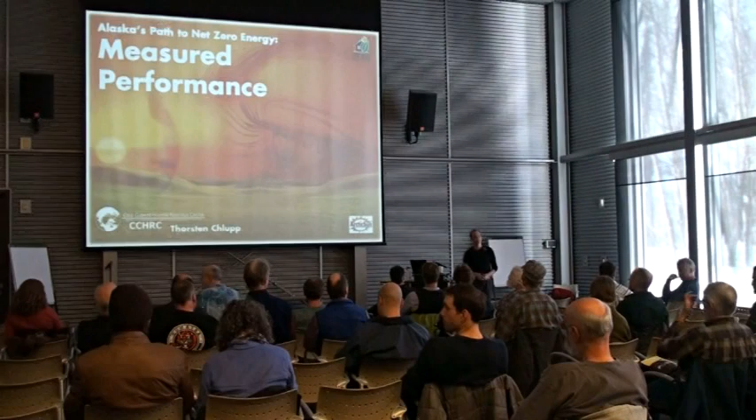Well, my background is basically I'm a home builder. I have a design build company in Fairbanks for about 12 years, and I work quite a bit with the research center. For the last 7 years I've become obsessed with energy and how to build highly efficient buildings in our northern climates, and especially the last few years have been quite a roller coaster ride for me. I believe we need to change, so that's my personal mission.

Why is measured performance really the crux? We can build buildings like this, but we really have to look back after a year and figure out, does this really make sense? Cost is really the driving factor for most of these projects. How do we build buildings which reach almost zero energy in our climate without spending so much money that it doesn't make any sense?

So looking at the Sunrise project, basically, that was to me more or less a research project. It was a personal house I built starting in 2010, finished in February of 2011. It's my personal family home, a new house I moved into with my family, we have 2 kids living with us and my wife. It was basically a goal of trying many different systems, and in the end, can we reach a building in this extreme climate which reaches zero energy?

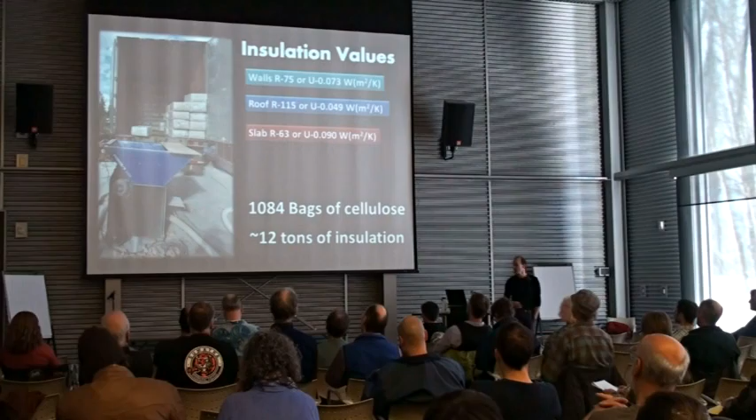The roof insulation was R115, and then the slab insulation R63. I established these values from historical data on buildings we've done before, and in addition, PHPP, the modeling software for Passive House, which gives us these guidelines on what we need to do to reach these levels of efficiency.

In this building, we use cellulose, a very low embodied energy insulation material. It's very cheap, locally available, made in Wasilla from recycled newspaper. We used about 12 tons of insulation on this building.

This machine is called Enforce 4. It's basically a machine I purchased to blow this insulation - an insulation blower. We'll talk about some of this more later too.

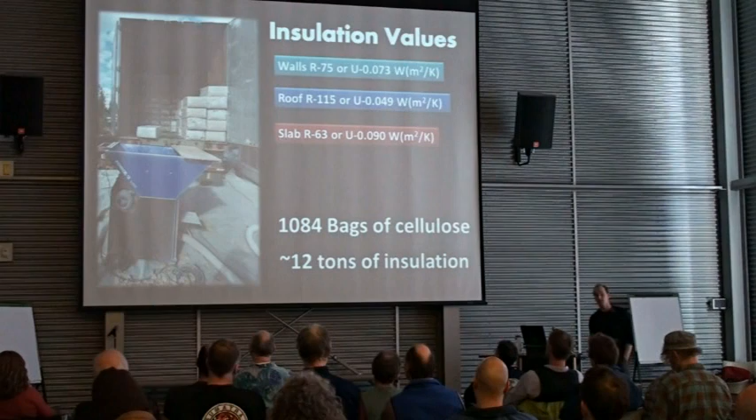Then the big crux of the whole project, really to get it to the level where it needed to be, was seasonal storage. This is not the first project I've done - I've chipped away at this for 3 years prior with different other buildings we tried. It's a very controversial topic. There's a big movement in Europe called Sonnenhaus, where they're building buildings just like this. However, in our climate, it's a little different, and it's very expensive what they're doing in Germany.

Average tanks are in the $54,000 to $60,000 range. So how is this feasible in our climate? How can we sell it to people and provide solutions? So I was just trying to come up with some more affordable ideas. I used a 5,000-gallon old stainless fuel tank, which we cleaned up and retrofitted, and we'll talk about how we went about this.

And now we're looking at one year later. This has kind of been a rough ride - a lot of things have gone right, a lot of things have gone wrong. It was an extremely challenging project, and it took a lot of thought and figuring out, and that's kind of how I feel today. It's a long road to really figure out all of these systems, and I'm not claiming I have all the answers, but I'm sure trying, and that's, I think, all we can do.

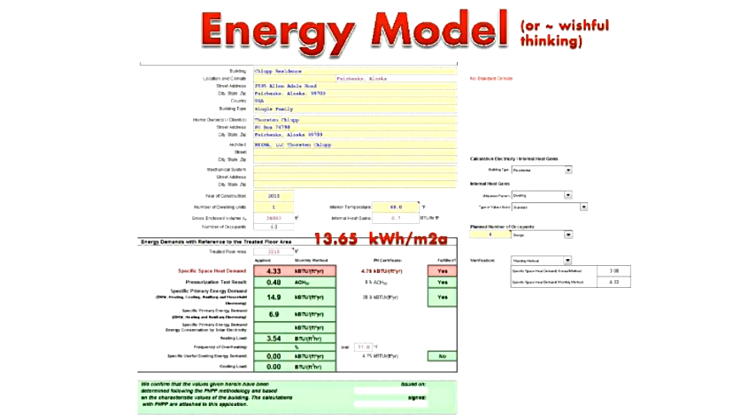Basically, the model gives us a benchmark which we need to achieve for passive house, which is 4.75 kiloBTUs per square foot per year, or 15 kilowatt hours per square meter. That's basically our target range as far as heating demand goes.

Air tightness is the #2 number here. The 0.6 is our benchmark. I personally believe for very cold climates like here, we should set that benchmark even lower. I'm trying to shoot for 0.4 right now. Energy and air tightness is really closely correlated.

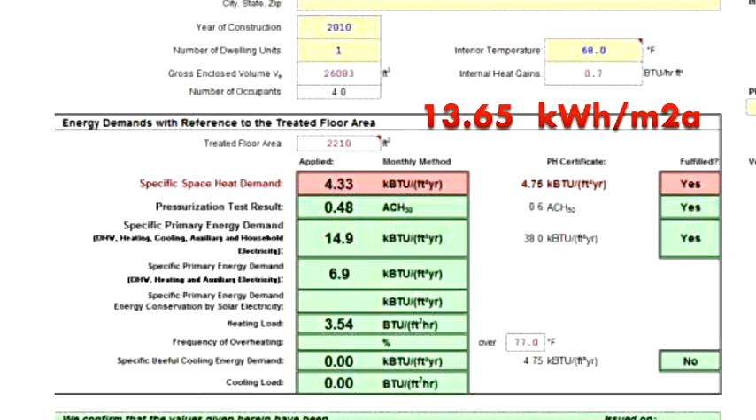And then primary energy, basically that's the total energy consumption, electricity and all of the other things combined. And then cooling for us in our climate is really not a big challenge.

So energy rating at the end of the project in Alaska, we have through Alaska Housing, basically the 5-Star Plus program. As you can see, we had 100 points, so there is no more than 100 points. If we have 110, nobody knows. The software is not geared at all at high efficient buildings. We're still stuck in the 80s as far as how we're looking at buildings.

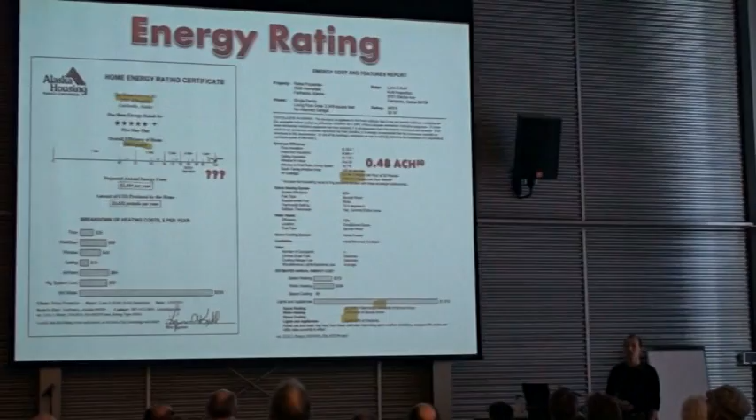And it's clearly shown on this energy rating, basically, which was done from a certified rater at the end of the project, that we don't know how to rate these buildings here just yet, which is sad because we really should build buildings like this.

And then, of course, a year later, it's very simple for us to figure out what did we consume and how much electricity did we use. I used quite a bit more electricity than I wanted.

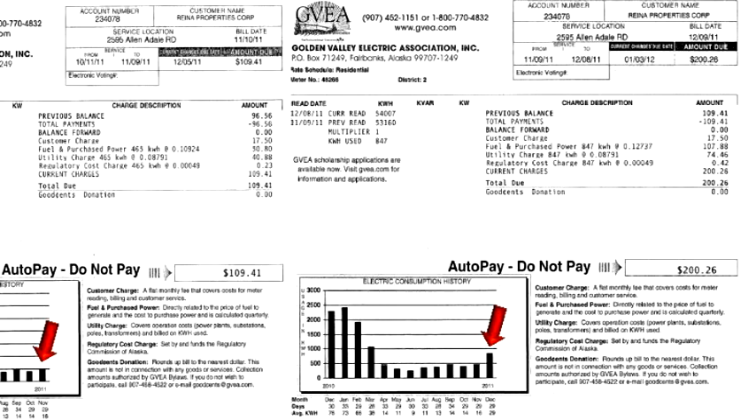One of the main things I completely forgot about was plugging in cars in the wintertime on the energy model. We did really well in the summer, but as soon as the winter hit, at Fairbanks we had a very cold winter this year. We already hit 50 below in November, which I've never seen before. And if you plug in 2 cars, that is a huge extra load on the building. I don't know how I forgot about that.

So we consumed for the first year about 6,480 kilowatts, which is not bad, but it's more than I wanted to be for the first year. So there's quite a bit of optimization I'm going to have to do to reach my goal, which was in the 5 kW range.

I have a lot of leverage still in lighting, where I spent not as much money as I wanted because I ran out of money at the end of the project. So with some better LED lighting, which we're going to upgrade to, will help. And then figuring out what to do with my cars.

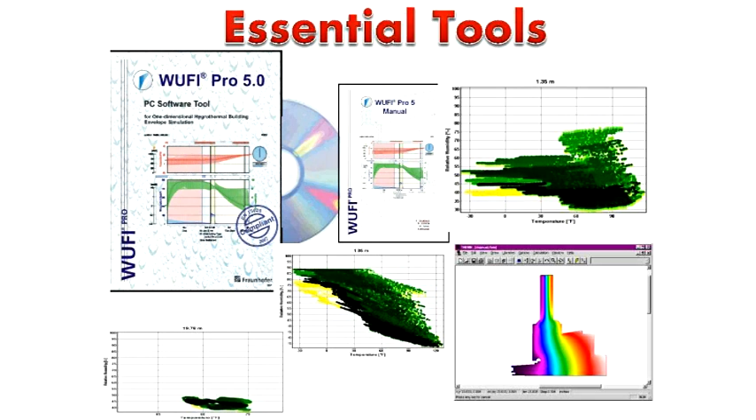Essential tools, basically, which we use to start off with. We extensively tried to model the wall system, which is the Fusion Open with WUFI, which is a professional software program developed in Germany from the Fraunhofer Institute. And then Therm basically was developed by Berkeley National Laboratories. That's used for thermal bridging.

And then during the 1-year period, I went ahead and spent quite a bit of time with thermal imaging, trying to figure out settling in the walls with the cellulose, thermal bridging, hidden thermal bridges, things which you just don't see with a regular eye, for optimization.

I'm very, very big on indoor air quality, so we spend quite a bit of time monitoring that. And then, of course, blower door test. We blower door test several times during construction to reach the air tightness level. And then at the end of the project, and then I always do one year later to see how is this really resilient, how is it performing a year later?

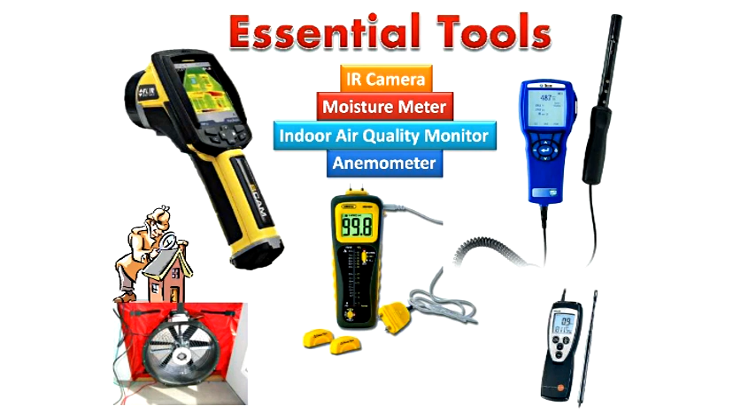And that's where we use the anemometer too, to measure these very low pressures basically on pressurization. Blower door, most people nowadays are familiar with. We basically place it in the entry door. We depressurize the house at 50 Pascal air exchange, and we measure basically the volume of the house compared to how much are we drawing out through small leaks.

And to reach passive house at 0.6 is difficult when one starts out, but for us it's really not a problem anymore to reach these levels. It's just the building system, the way we go about it.

In Europe there's a whole trade now basically for air tightness, like a carpenter here. It's an air sealing trade basically, where people go to school and that's all they do, they air seal buildings. In retrofit or? Either or, yeah.

New construction or retrofit - the United States is unfortunately the only country left in the world which does not place high interest on air tightness, whether new construction or retrofits. Our current energy code, the new revision, is still looking for 7.0 air exchange at 50, when we're looking at 0.6. That's pretty sad, especially in our climate, where that's the cheapest way to save energy, really.

In this building we have an extensive data logging system. Cold Climate Housing Research Center has a grant from Alaska Housing to monitor all of the systems, and there are many sensors placed everywhere to figure out what works and what doesn't. Unfortunately there's a problem with building science and monitoring buildings - it takes time. We're here a year later, do I have all the results I want? No. There's so much data that needs to be analyzed, and people don't have the time - everybody seems to be maxed out with many projects. So I wish I had 100% of the data from the first year, but I don't, and it takes time to figure all of this out.

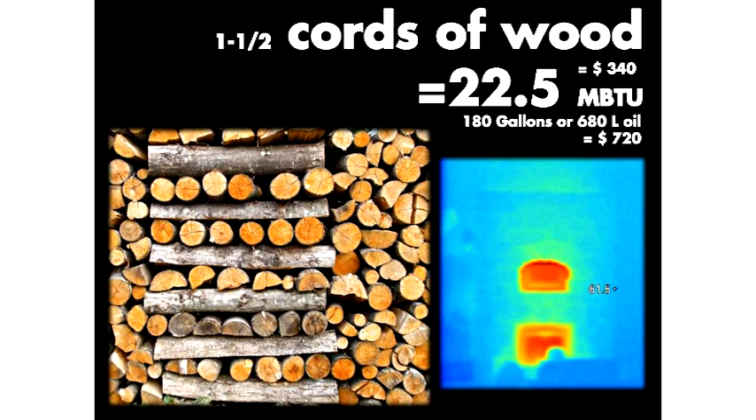So we burned this winter in our house 1.5 cords of wood, which is kind of what I estimated. To put that in perspective, that's 22.5 million BTUs of energy, equivalent to 180 gallons of heating oil - most people understand that a little bit better. So for a 14,000 heating degree day climate, for the dead of winter at 40 below, especially this winter which was very, very cold, I think that's pretty remarkable.

This picture here is the thermal image of my masonry heater. I just want to point out this is actually a picture taken into the window against the thermal shutter, reflecting the heat back into the building, which is pretty neat to see how well that functioned. That's basically the fireboxes - the rest of the heater, one hardly sees any heat coming off, which is very important compared to a normal firebox.

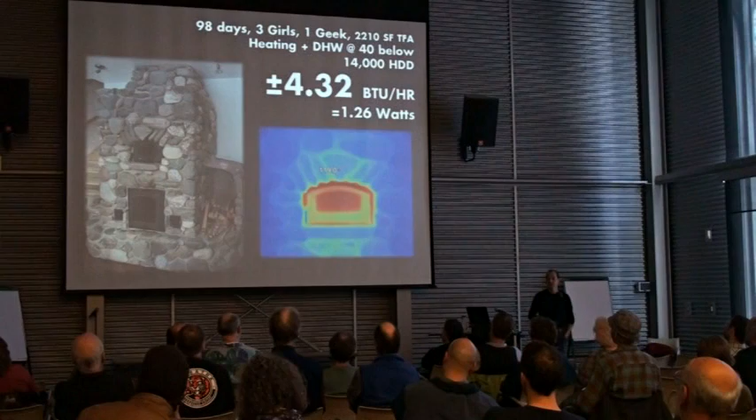You would completely overheat in a building like this because it's so super insulated. However, with a masonry heater we have so much mass that it radiates out slowly. So here in the thermal image again, there's a lot of heat but only a slow radiation of heat out of the building. I was a little worried about it - this is a 2-story building, 3 bedrooms upstairs, doors, all of these things which make heat distribution difficult. I wasn't so sure how this was going to work with just the masonry downstairs as the main heat in winter without anything else. But it was really never a problem.

We fired it usually once in the morning and once in the evening, and at 4.32 BTUs per hour basically, we didn't have a whole lot of heat demand.

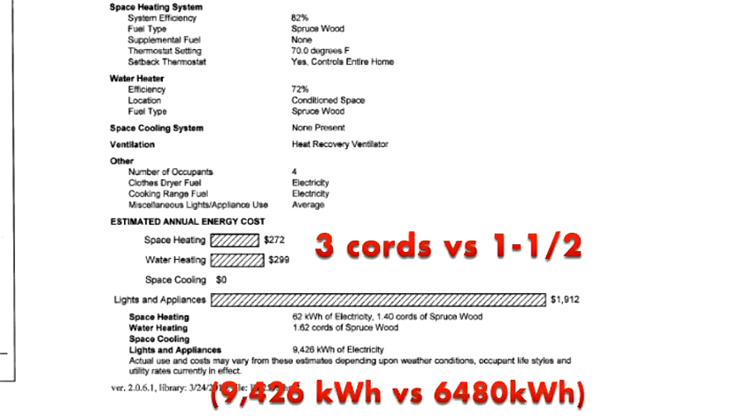So if you're looking back at our energy rating, estimated with 3 cords, we only used half of that. Also electricity, about 30% less. I just want to point out that this software program, AkWarm, basically for buildings - especially high-efficient buildings - is completely unsuitable. It's a very good software program from the 80s, but nowadays we should really come up with some better means of rating these buildings.

So we're looking at a climate in Fairbanks where we're dealing with 40 below temperatures. What's the problem with 40 below air? There's nothing left. At under 40 below, there's no moisture left, period. So one of the bigger challenges we face for healthy buildings in Fairbanks is how do we keep healthy indoor environments? We need to maintain, in my opinion, about 40% relative humidity for human health. However, in any other building I've built before, in the dead of winter, we're running about 20%, 50% less. Which is a huge problem.

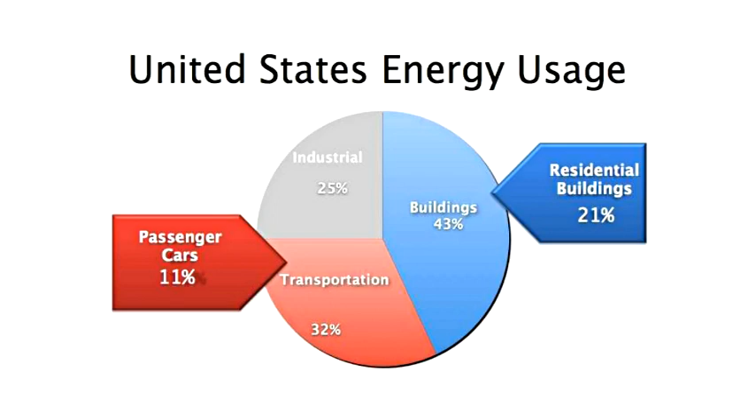The problem is we're running out of heat. So if we're looking at the United States energy usage, really, just to put a perspective on it, why are we really concerning ourselves with buildings? Because it's really the biggest consumer of energy. Most people don't realize that. They think that transportation is the problem, but it's really buildings. Buildings is the low-hanging fruit where we can gain the most.

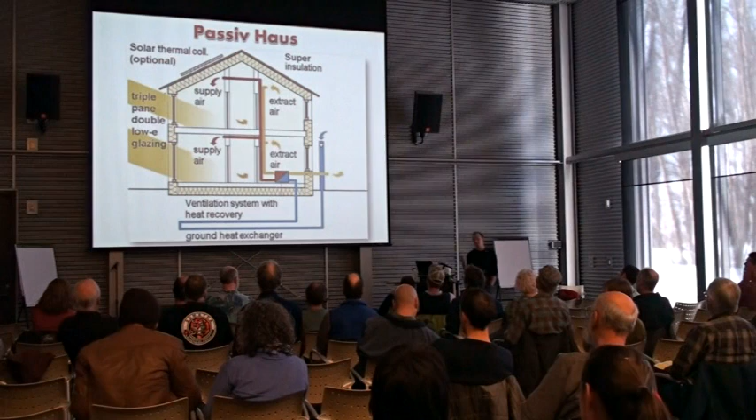Going to net zero is a little bit more. Are the German and Danish figures achieved with the infiltration standards you described? Yeah, in Germany there's over 20,000 certified buildings. We have 13 certified Passive Houses in the US right now. We haven't even scratched the surface as far as the United States goes. We're really not into that yet.

Can you, on that last slide, say how that compares to your units? You had 1,000 BTUs, 1 million BTUs per square foot? As far as my building, the conversion between the two - we're at 15 kilowatt hours per square meter, basically, which is what Passive House prescribes. I was at 13.62, so we're definitely at Passive House level.

So just to recap, Passive House is really all about insulation, air tightness, and reducing primary energy demand. The big missing link from the 70s, when we'd already done all of that in the first oil crisis, was ventilation. We built a lot of really super-insulated buildings in the 70s. Older folks here know all this. Passive House more or less was invented in the 70s in the United States and Canada. But we missed the important point that we need to ventilate very airtight buildings.

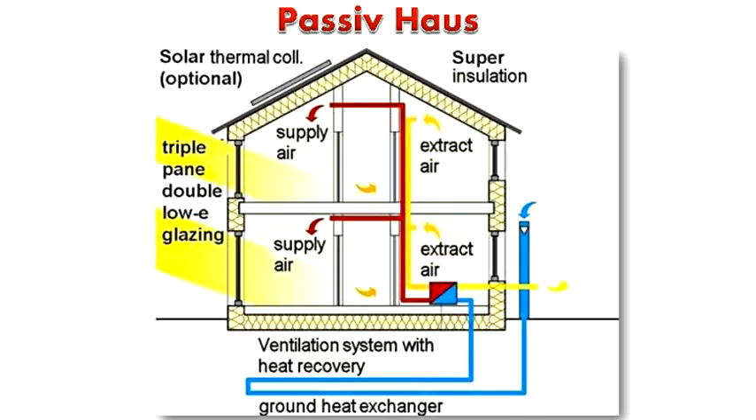Technology wasn't there, our knowledge wasn't there. We knew everything else on the building side, but we didn't understand how to ventilate properly, which led to mold problems, moisture problems, very uncomfortable houses which started rotting away within 10 years. That's, in my opinion at least, why super insulation never really caught on here in the 70s - not because it didn't work, but because we didn't understand ventilation.

So if we're looking at this, what do we really need to do? I think we need to look at people, at health. Buildings are about people, not about buildings. People should be healthy before they concern themselves with energy. It doesn't help us if we build something energy-efficient-wise and then it kills us because it's unhealthy. Comfort is huge for us - more people are concerned about comfort than with their energy bill. Then, of course, money and embodied energy.

If we're building highly efficient buildings, embodied energy - basically the energy it took to make the materials to build the building - becomes much more intensive because we're using more materials. So that really needs to be taken into consideration. An example would be insulation material: if you're using a foam-based insulation material versus cellulose, that's a factor of 64 in embodied energy. That's huge as far as how much energy has gone into the production.

If you're looking at all of this, it's a huge maze. How do we make this all happen in modern buildings? Fit us - people, health, costs - into something and make buildings which really function for us and for the future. I really think that looking back at some indigenous wisdom, what we did 10,000 years ago when we lived here sustainably, helps us a lot - it helped me a lot to come to terms on how we can make buildings work.

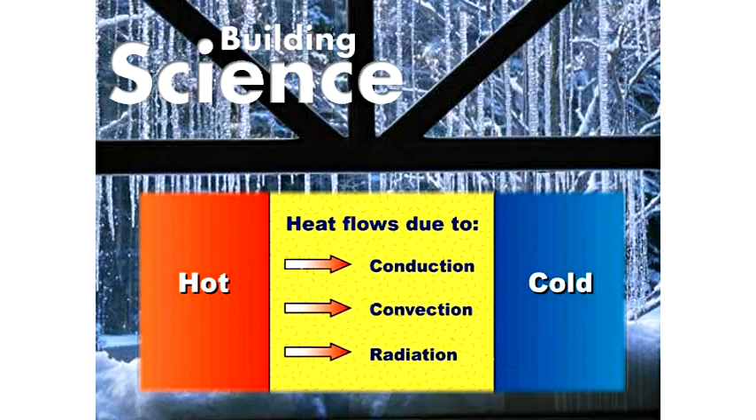And we need to think outside the box. It's like on my house, it would take about an 18 kW photovoltaic system to reach zero energy without heat storage. Very unfeasible, would never be marketable. Where are we going to put a huge photovoltaic system like this? It's impossible. So seasonal heat storage with thermal collectors, which are much more efficient and solve the problem of heat first and foremost, I think is one of the examples of thinking outside the box.

Simplicity - everything we do needs to be so simple that we can walk away from it. I can walk away from my house and not have to worry about heating. I can log in and see I created 168 degrees of heat this morning, but I don't have to worry. I don't have anything which can go bad. The maintenance is very, very simple. And the simpler we can make these systems, the better. That's my main goal right now - how do we simplify this to make it cheaper?

And I think the key thing to come to terms with is buildings are not about buildings. They're about people, about us, about people living in buildings, especially in northern climates where we spend so much time indoors. That's something we have to rethink, because the current trend is all about the building, the design, and not about the comfort, health, and environment inside. What makes us human, and what's really important at the end of the day - where are we coming from, and what makes us feel comfortable and healthy in a building? I think that's something we're not thinking about enough.

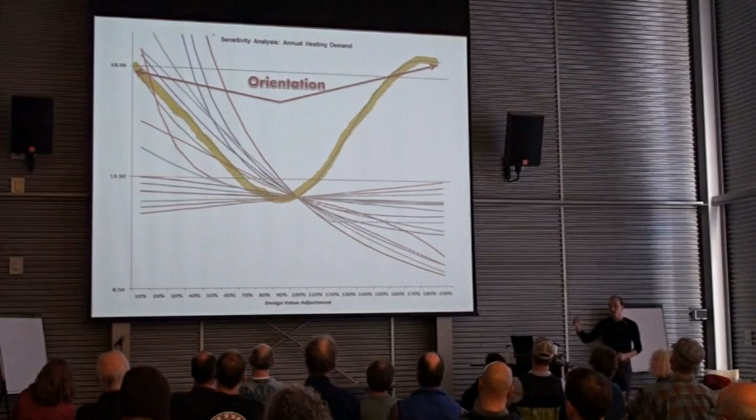And then now we see all of these white lines going all over the place, and we see a percent and a heat demand column, left and right. So this is a sensitivity analysis, basically, to figure out what makes the most sense in a building to improve efficiency - where's the easiest means of finding improvements.

So if we're looking at this line here, this makes a huge jump - that's basically the orientation of the building. So if we're looking at a building, if we want to collect passive solar gain, and we have the sun here, and we put all of the windows there, there's a problem - we can't get the sun in here. So orientation, of course, makes a huge difference. Placement of windows - all of these things which are so logical, which on an average building we just don't do - are really clearly shown here in this line.

The reason why this is not down here is because right now the client decided to put this building at 189 degrees instead of 180, which would be optimum. That has site restrictions, which I think can be solved.

I'm sure they will go the other way, because this is still a lot of gain we can get for free. All of the other lines are basically looking at slab insulation, wall insulation, roof insulation, and all of the other things. We're going basically baseline, 50% increase, 50% decrease, replacing 50% more insulation in the walls. What happens? This would be wall insulation right here. So if we're increasing wall insulation, that's our low-hanging fruit right now. That's where we see the easiest gain.

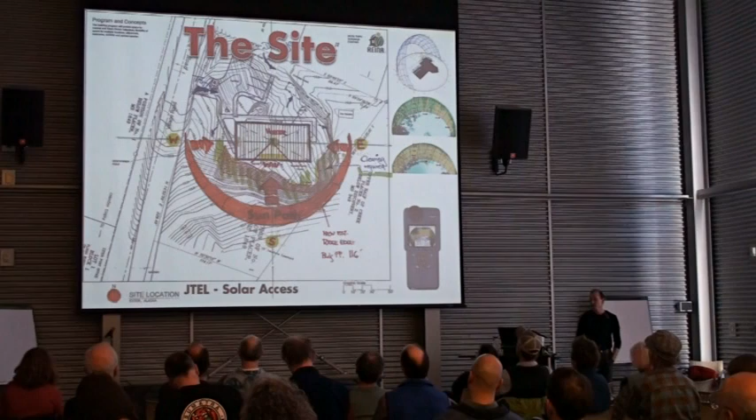We have great tools available nowadays to do this really easily in real time on site. I use a SunEye, basically this little gizmo here, where we can go on the site and instantly with GPS and weather data from the local weather stations figure out exactly where's our optimum, where's our shading, where we can simulate how much vegetation do we have to take away, all of these things in real time. Very, very helpful.

And that's really the first step. Before I design a building, I always go on the site. I always take readings and I figure out what's my baseline, the site. And then, of course, we've got to place windows where they belong, and we've got to glaze them so we can capture the free energy, so the orientation of the building.

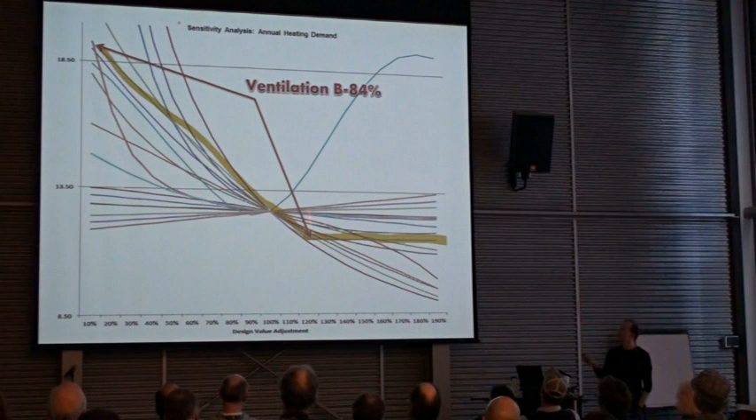The next big thing really is ventilation. Again, if you're looking at our chart, we come straight down here, and that's overtaking wall insulation at the beginning. Why is this flat lining here? Anybody want to take a guess? That's basically 100% heat recovery ventilation. We can't go past 100%. So technology is an end.

That's where it flatlines. Is the design value adjustment percentage based on something? Yeah, it's just a percentage. It's percentage basically on wall insulation. You would look at an R80 baseline or an R79 or an R81 basically. That's how this model basically establishes this.

It's a pretty simple logistical overlay on top of passive house. So passive house provides the baseline for all these different factors. This basically establishes my baseline by doing the whole energy modeling in passive house. And then I create on top of that an additional model which gives me the opportunity to look in both directions. If I go 50% this way or 50% that way, what happens to the building? What happens to my baseline? So that's basically how this is established.

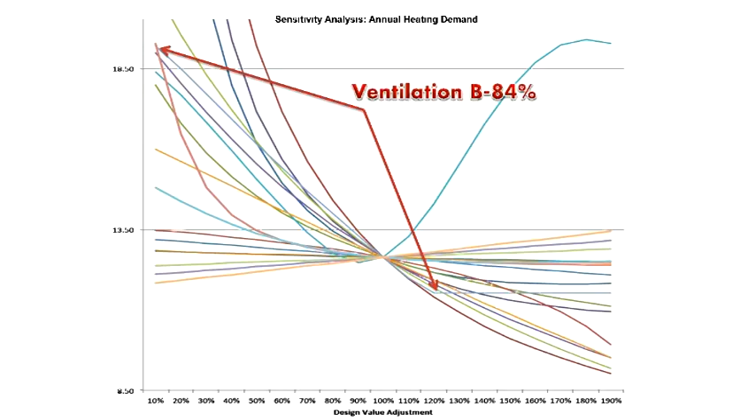It's just an energy model on top of a model, just to find the low-hanging fruit. I spend a lot of time on this just for optimization ideas on how do we optimize buildings for our climate. Once we've done this once for the different climate regions, we will have much better answers for this. We don't have to do this on every building, but right now I think there's a lot of value in this to figure out what makes the most sense. Does this come out of the passive house software? No, this is something we created in-house.

So why is ventilation so important? I can't stress this enough. Unfortunately, so many people don't realize we are really depending on good air. We are, per day, taking 20,000 breaths. We consume 35 pounds of air, but we just don't know it. It's something we just do. We can't see bad air. If we could invent magic goggles which will tell us all the bad things in the air, how low the humidity level is, all of these things which influence our health, our industry would be jumping 100% tomorrow. But we don't see it. It kills us slowly, and we have all of these problems in all of these buildings because we just simply don't know it. So ventilation is really important.

I used a German HRV system in my building.

The reason for that is you cannot buy really good, high-efficient heat recovery ventilators in North America right now, unfortunately. We are still stuck as far as recovery goes at a fairly low level. These units are passive house certified.

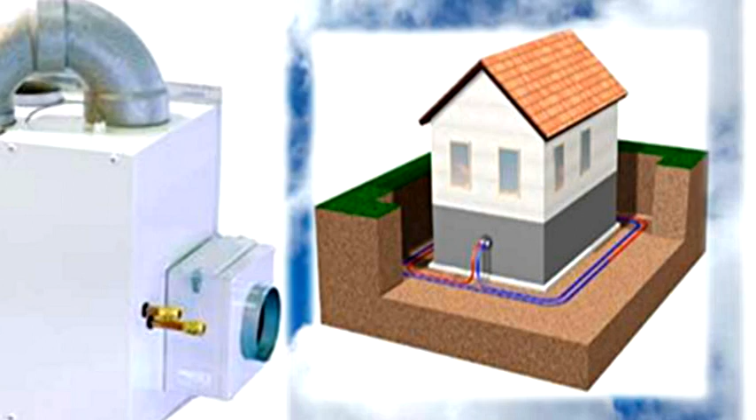They're third-party verified in Germany. This unit has a combined ground heat exchanger which plugs onto it, where we take the heat of the ground to preheat incoming cold air, which is a huge problem for us at 50 below. Bringing 50 below cold air into a heat recovery ventilator, what happens? It shuts off, goes into recycle mode because it freezes otherwise. We've been able to get much better with this over the last 20 years, but we're

by far not even close to where the units are in Europe right now. This basically takes a loop of 400 feet of 3/4-inch PEX with glycol and runs it through the ground. I bury these loops about 12 feet down, and I run them under the septic systems below that to capture residual heat from the septics.

I'm able to get at least 42 degrees. Our core ground temperature in Fairbanks is 34 degrees. So instead of 50 below air, we have a plate exchanger which preheats that incoming air to 40 degrees. Instead of 50 below, we're always looking at a baseline of 40 degrees at least, which is huge. At really cold temperatures, we're still maintaining 2 to 3 degrees differential between supply and return. Why is this so crucial?

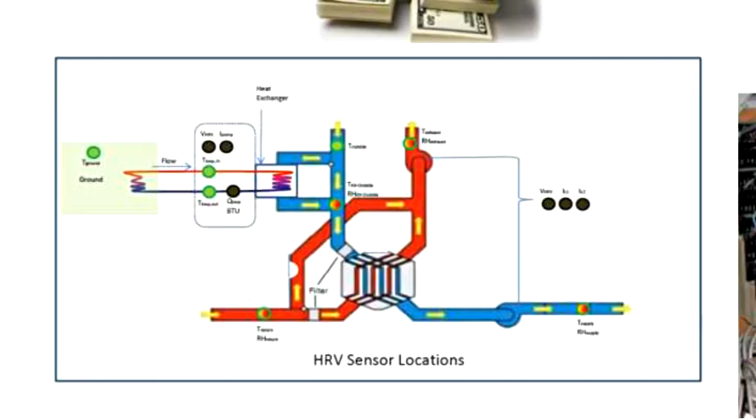Comfort. It's comfort, for sure. If you're looking at energy, anything we're dumping out of the building, we have to replace. So any heat which we are removing from the building through ventilation, we have to reheat. The more we can recover through a heat recovery ventilator, which takes the incoming cold air and preheats it with outgoing warm air, the higher our efficiency on the building. This is really the low-hanging fruit.

Number one, for health, because it's very important. Comfort—if you have cold, drafty units, which is a big complaint on heat recovery ventilation, still in the dead of winter. Noise is another big part of that. There's much lower noise level on European units than what we have here. And that is really where we gain the most.

On a public building, I've just finished the modeling on a small library project. That was by far the greatest savings, going to European-based units, which we're specifically getting for this project because of the heat recovery ventilation. So this is really a no-brainer, something our marketplace really needs to catch up on.

This is some sensor data out of the ground, which we have several sensors placed by the outside heat loop. One concern was, if we're taking this energy out of the ground, will we create permafrost in Fairbanks? That's really not the case—our temperature has actually gone up quite a ways. So that's pretty interesting.

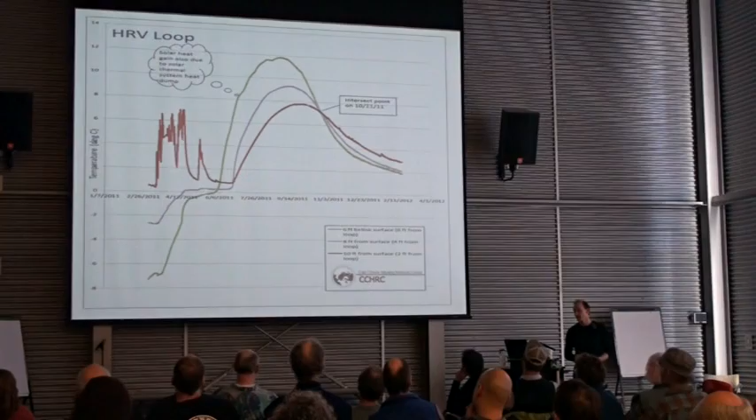We will see a whole bunch more of these. We could talk about any of these for hours. We don't have the time, but if you're really interested, look at Cold Climate for the report on this. There will be a report about a ventilation system, and a report about a wall system—third party, not from me, but from the research center, so not a sales pitch. They will have the data sets available too. Our goal right now is to get everything live streaming so people can go on and see it, and there will be explanations about some of these.

Do you know when those reports will be available? No, I unfortunately don't. It's kind of out of my control, and everybody's extremely busy. The research center is extremely busy, and finding time is so difficult. Like 6 months or a year or 2 years? I said last year it's going to be 6 months, and now we are 6 months later and we still don't have anything. Do I have a good answer? No. I hope we have them out by the summer, but I can't tell you, unfortunately.

On your last slide, you had permafrost at 6 feet? No. This is basically, forget about this baseline before it was run out—this is really what we're looking at. Are you on permafrost? No, we are not on permafrost. But our level between 34 degrees core temperature and permafrost, the margin is very slim.

So if you extract a little bit extra heat with a heat pump, the concern is in our area that we're artificially creating permafrost by lowering that threshold. I'm not on permafrost myself, but why are you concerned about creating it? Why are we concerned about it? Because that's not necessarily a good thing for a building.

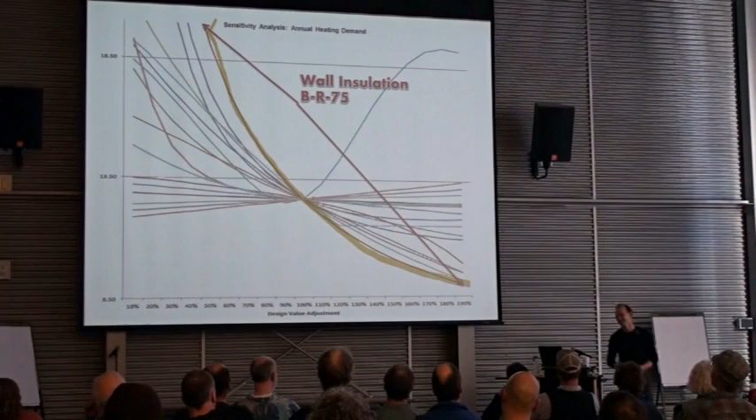Here we're looking at the same thing, just looking at the wall insulation as the second item. This here was ventilation, this here is insulation. If we run this all the way out, insulation really makes sense. If you put no insulation in a building in Fairbanks, Alaska, it's really cold. I don't need computer modeling for this, but it's pretty interesting to see how dominant wall insulation really is. Why is wall insulation much more dominant than roof and slab? Is it surface area? Yep, exactly, it's the most surface-to-volume ratio on the whole building. Much more wall than roof, much more wall than foundation, so the wall is really our best trend.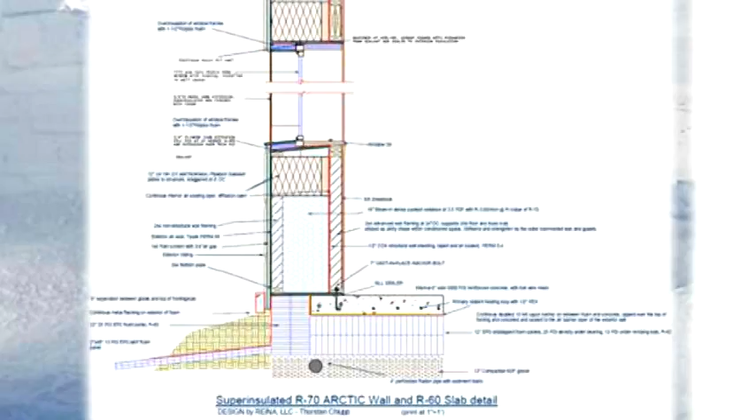For this building I basically built this prototype diffusion-open wall system. I call it the Arctic wall, but we can call it anything. It's really nothing else other than a REMOTE or PERSIST outsulation material, which is normally built with foam, sheet good foam or sprayed-on foam. We replaced that with something more renewable, dense-packed cellulose. But the principle is still the same. We have our core structure on the inside, that's our building, and everything you see on the outside here is just fluff, that's the insulation we're placing on the outside. It's cold on the outside, so we need the insulation on the outside. This is all dense packed, and in the roof it's also dense-packed cellulose. It's a cold roof, the insulation sits right on top, so it's completely wrapping the insulation. The ground insulation continues up and all the way around the building, so there's no cold bridge anywhere. Out here is the wing insulation that helps keep the frost from going under the building in the winter time when it cools down.

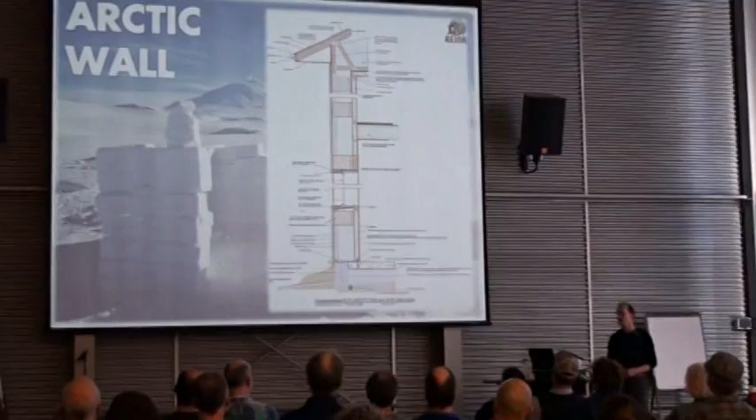What supports that outer wall? Does it have to have some mass? The structure is really right here, and then you see the gusset plates. The gusset plates basically support all of the weight off the main building. It's not really supported on the main building, it supports it, so we're basically just hanging it off the building. It's a lot of weight, but it's just an engineering, a math question. It works really well. This is my standard detail right now. We do an 8-inch slab so we don't have to worry about footings anymore. It's labor cost-wise, and the extra heat storage is much quicker. We just form up an 8-inch slab all the way around, we don't place any more footings anywhere, we just pour it, very quick, very easy, and it gives additional heat storage.

So then with your insulation, you don't worry about getting below frost depth because you're so well insulated. Yeah, shallow frost protected foundation systems in general place no insulation under the footings, for a total heat loss approach in a high efficiency building.

It took many years for me to get engineers to sign off on this, but I've never seen any issues. We have sensors which show the same thing. The minute we have enough insulation and we place it on non-frost susceptible soil, this compacted gravel, there's no frost heaving because it's not wet soil.

If this were wet clay, I would be very worried about it, but I would replace it with gravel. What is that exterior material, level with the slab, down below there?

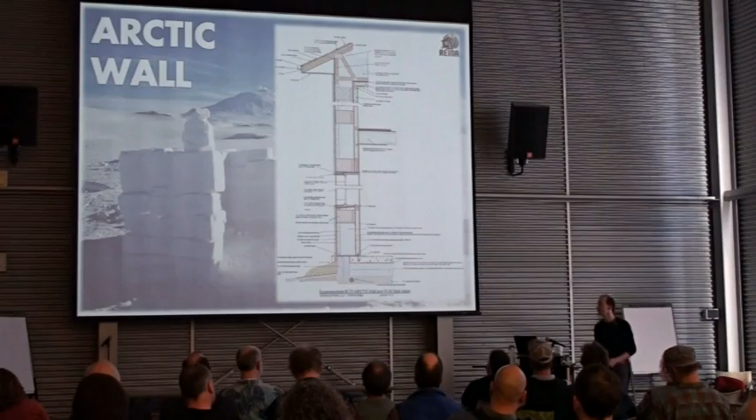Why a diffusion open wall system? Why did I want to try this? There's multiple issues, but the main thing for me was the drying potential in any direction. We cannot build anything perfect. Over time we will get moisture in any wall system. If we're trapping it in something which cannot dry out, and we have a problem, we create mold. As long as it can dry, there is no real issue.

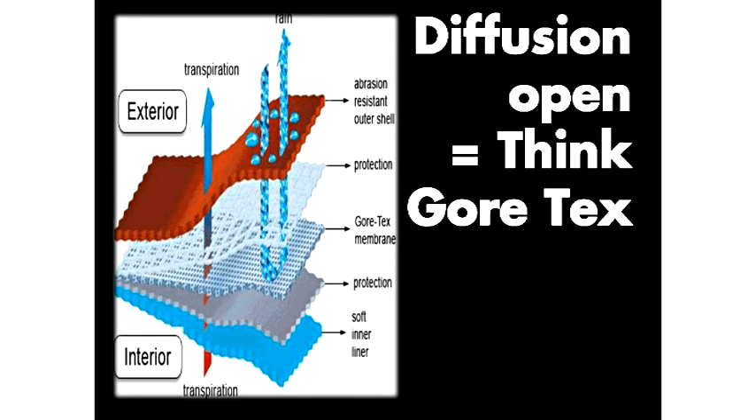It functions like a Gore-Tex jacket. We've had this for many, many years, and in Europe this is very common too. However, in North America we're very adamant about having something very impermeable on the inside in a cold climate, and building code prescribes that too. Like in Fairbanks, we're required by building code to have a class 1 vapor barrier, which is equivalent to a 6 mil poly.

What I'm using basically is plywood, CDX plywood. Time really is my main concern. Over an 80 year lifespan of a building, moisture will get into this wall. It's ignorant for us to believe that we can build something completely perfect. If it can dry out, it's not an issue. If it can't, then it will split rocks over time.

Did you get that from the Baubiologie? Yep, Switzerland. Baubiologie in Europe has been very big for many years, and there's many other points which flow into it. If we're looking at walls or building systems in general, as far as durability is concerned, durability is essential, otherwise the building falls down. Temperature, relative humidity, and time is really what makes buildings stand or fall.

And as long as we control these, if we don't, and time comes into play 5 years later, we open the wall and we have mold, we have dry rot, which I've seen on a lot of buildings. If we built it properly, we have a building for 100 years. I've looked at buildings which are 2,000 years old, wooden buildings, absolutely functioning. If we keep the things which make walls fall apart out, nothing can happen.

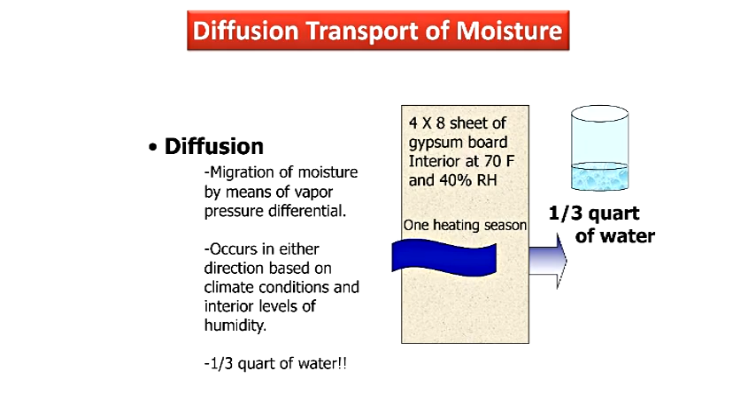Why cellulose? What's so great about it? It has a very high density. It's very heavy, and it has therefore a high heat storage capacity. So we can store a lot of basically heat from the building within the wall, within the system itself. If you're looking at 12 tons, that's a lot of weight. There's a lot of density, there's a lot of heat storage capacity within the building, basically.

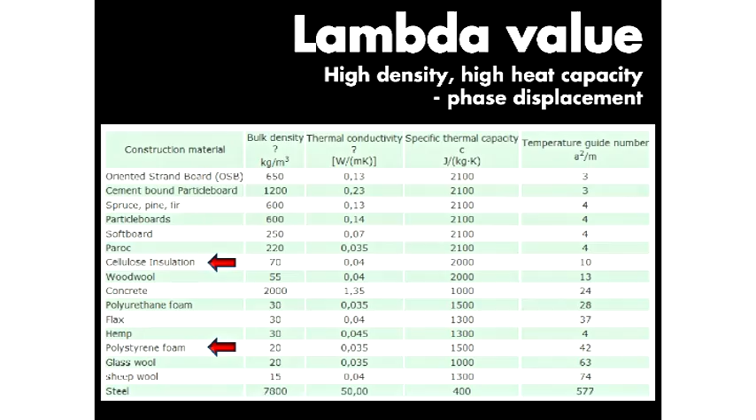This is the pressure boundary. Basically, this is our air tightness layer. We're using CDX plywood as our diffusion layer. It's wood, basically, so it can handle moisture. It has a perm rating of 0.6 when it's dry, about perm 1 once it gets a little bit more wet. And that's what allows us basically to diffuse moisture in each direction, which is very important going back to the relative humidity, storage capacity of the building.

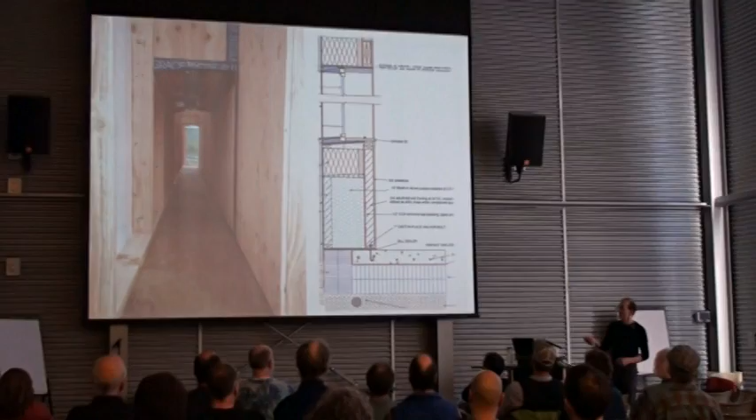Settling is definitely a big question. How do we keep this from settling in a wall like this? So, how wide is this? This is an 18-inch cavity right now. The beauty about this wall really is that we can create our R-value very simple, very easy, just by the gusset plates. The material basically it takes to build the wall is almost the same, going from 12 inches to 18 inches. Doing an R70 wall versus an R50 wall, you're looking maybe at $800 difference in material costs. So it's very cheap as far as reaching these high-level R values.

If you would do this with a spray foam type material or with a sheet good material, the costs are exceptionally higher going to these higher levels. The material itself is cheap, and the only thing which really changes is that gusset plate, the length of it. So for Anchorage, would we need 18 inches, or we would figure that out basically through the energy modeling.

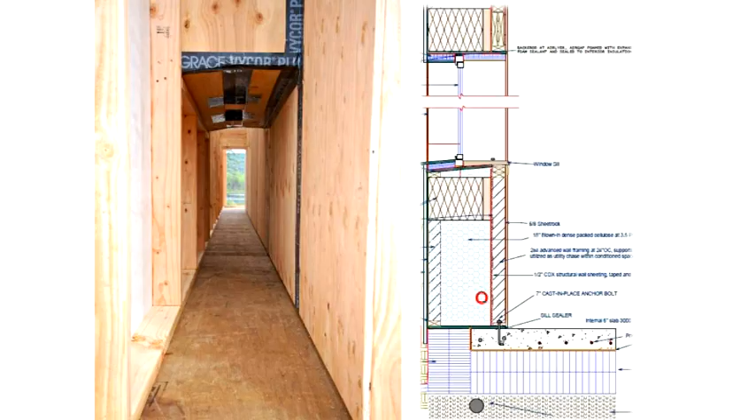This is our thermal boundary. And this is very, very carefully air sealed. All done underground. It's fairly simple, really. And then now, this is very much protected. No matter what you do on the inside, if you hang up a picture or whatever else, it doesn't put any holes into our pressure boundary, into this air tightness layer.

This is a shot down from the attic into the wall, basically, being dense packed. And here you give a pretty good size comparison. This is my little girl.

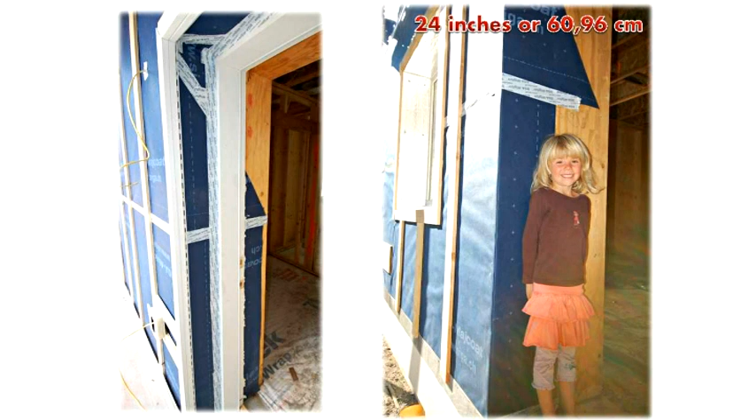So we're having a 24-inch total thick wall. This is our standard wall. I haven't built anything else since last year. This is really our baseline wall now. It's very cost efficient, and it works extremely well. I'm using on the outside fabric from Europe, from Swiss, which has a very good permeability. It's a perm of 54, so it can shed moisture out really well. We have an airspace between the siding and the actual membrane to allow, again, for drying potential.

So if we're looking at some sensor data, a lot of people were worried about this wall rotting away in 3 years because it's not going to work without a vapor barrier. If we're looking at the data, we're not even close. We're well below 16% on our humidity level within the wall. So it functions really well. It's the same design as a commercial roof, only vertical.

Are any bathrooms on outside walls? Yeah, you're looking at it right there. Yeah, of course, we measured, especially all the wet areas, we measure carefully.

Interesting thing is really to see how well this membrane works. We're looking basically at a membrane, and we have one state of humidity and another state, and we have a very hygroscopic material with the cellulose, so it can soak it up and release it. If it's getting wet, it's a problem, but if it just gets to a certain point under the 16% range, it can store it and release it back in. Through diffusion, through the plywood, through the wood, basically, we can achieve this. And this is what we really see well on these slides.

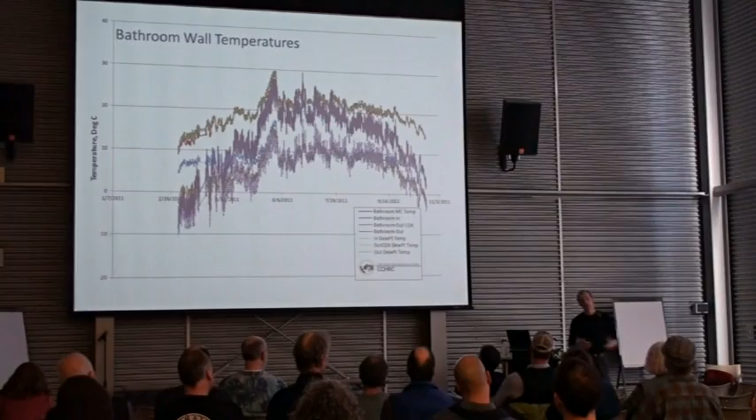Again, you really need to look at the report for clarification on some of this, because we could talk about this all day. But what happens is we're fluctuating in between. We're creating humidity in buildings, and then we leave, no humidity is created, and the inside will take on the state of its next door neighbor. So if the wall has that storage capacity... we have usually in buildings condensation on windows, wet dripping walls, because it has no place to go. It has no capacity to store temporarily moisture. And we have high humidity levels, and then we have very low humidity levels in buildings. That's just the way it is. We all come in here, we create humidity, leave, and then somehow this room has to deal with it. On a commercial building, it's a little different, but on a residence, it's the same principle.

And really, with this wall, we were able to achieve 40% all year, even in the dead of winter. If you decrease the permeability of your plywood by doing something like putting a traditional vapor barrier on it, what would happen, do you think?

Well, it's fairly simple. We would basically lose a drying potential to the outside. Would it work? Yeah, probably. However, we would lose two things. We would lose the humidity storage capabilities of the building, which I think is very important. And then something which is talked about in building biology in Europe quite a bit now is how do we balance ion counts from the air, the things which make us healthy, why we need to go outside, why we need to take on sunlight. How do we balance this on a building?

It does not transfer through a vapor barrier. So, if we have electronics as an example, they create a lot of positive ions in the air. They would balance out if it could travel through diffusion to a wall system. If we are locking it out, basically it wouldn't be able to do that anymore.

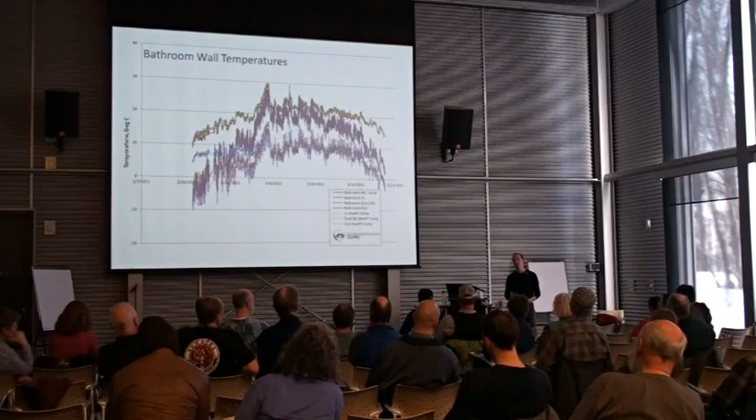It does, certainly does, absolutely, but not in a natural state. Right, okay, gotcha. But yeah, it does. We're bringing outside air in and we're replacing it. So long as you have clean outside air, you're good to go on that. Yep, but it's on a bigger scale. It's a natural balance, basically, not passive. Yeah, it's a natural balance, that's really what it comes down to.

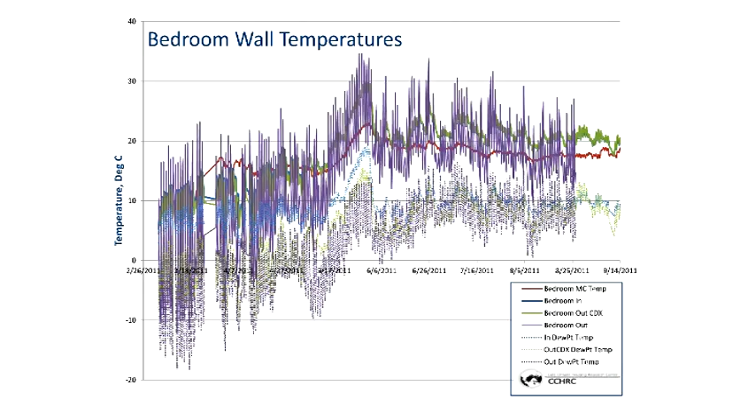If we're looking at this, this is from a bedroom wall on the south side. We see a huge scatter basically within the wall. We're looking basically at huge variations of transfer within the wall.

Why do we see this on the south-facing wall versus on the other? This is towards the west. Here, basically, what we're looking at is the heat storage capacity of this wall in reaction again to the outside. The heat storage capacity gives us a time delay, basically, as far as how long does it take energy to travel from the inside to the outside.

We're losing heat in a building because it's cold on the outside, it's warm on the inside. So by physics, by laws of nature, it's going to go from warm to cold, and we're slowing it down with insulation. How long does it take, basically?

If this would be a regular foam-based wall, there's maybe 6 hours of time delay. On a cellulose wall, what we're seeing is 13 to 14 hours time delay for the same amount of insulation, because of the density and the heat storage capacity.

So what happens on the south-facing side, if the sun comes up, the outer surface of the wall becomes warmer. And then we see these huge fluctuations where the temperature—BTUs don't care, inside or outside, they only care about temperature, so they get confused. And the beauty is sometimes we don't lose any BTUs on this whole wall face, because the outside wall warms up so much that the flow of energy is reversed, basically. It's pretty interesting. So that's decremental delay, basically, is what we're looking at.

But if you're looking at this, this is inside, the green is outside, and the blue is outside of the CDX. This correlates really to what it's seeing on the outside of the wall. So if you're having a very high relative humidity on the outside of a thick wall like this, it doesn't care what the inside is. The outside will take on that state, which is very important to remember for wet climates.

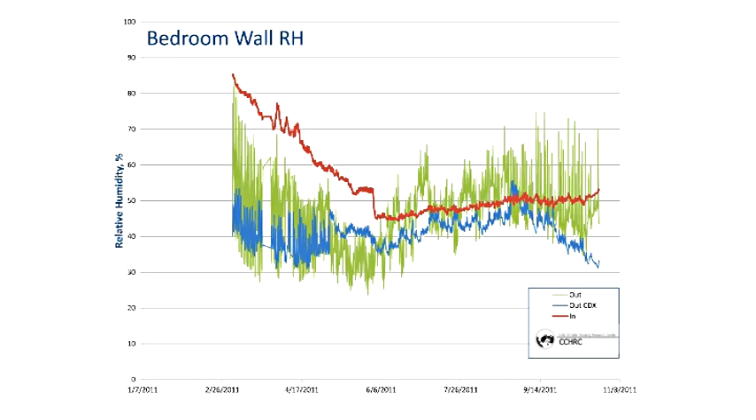On a thick wall like this, the physics is completely different than on a regular sized wall. The drying potential from the inside is just not there anymore. So we're looking basically at a sponge on the outside. It's a sorption, and it will take on the outside.

If you place a piece of wood on the dirt, it will take on the humidity from the ground. If we place it on top of some stickers and let airflow under it, it will be much better, but it will still try to soak up that relative humidity from the outside. So if we place a wooden structure on the outside of a 24-inch thick wall in Juneau, that wood over 5 years will probably rot because it won't dry. It has no drying potential—it's too far removed from the heat of the building, because the building is super insulated. It's very different than on a regular 2x6 wall, so something to keep in mind.

So, you're saying on a regular 2x6 wall in Juneau? Yeah, let's put it this way. We built a shitty building, we crank up the heat, and we always have enough heat from the building drying this out. Now we're saying let's build a super insulated building. We place the wood on the outside, but we only have very little heat in here, so the outside doesn't get anything from the inside—it's ambient outside all the time. Right. So it will only care about what's happening here.

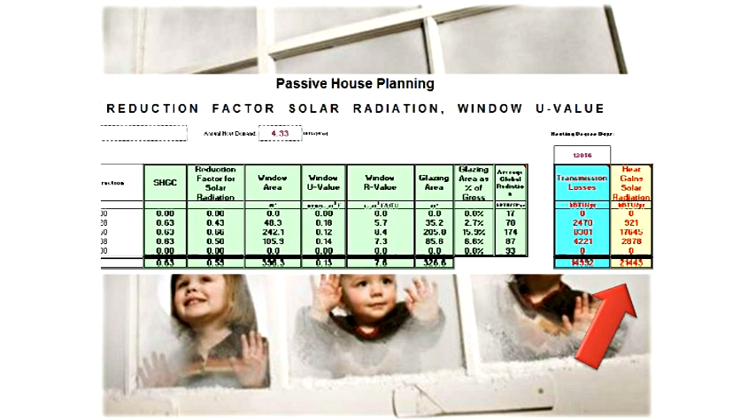Here again, our energy modeling software. Our goal needs to be that through windows, we're gaining more than we're losing. We can only do this in our climate with thermal shutters because we cannot build good enough windows. But this is the crux: we need to gain more energy from the sun than we're losing in windows.

Again, we need to look at the sun paths. We need to place windows where they belong, in the south. Hardly any windows in the north if we can avoid it, completely eliminate them. We can do daylighting through transom windows.

I use big, clear glass panes on the south-facing side, basically like here as an example on our living room. This is a window 16 by 9, basically 16 feet by 9 feet tall, with a little ventilation window on the bottom. Does that mean no coatings?

No low-e coatings? No, this application here was a heat mirror. We've gone away from that. We're using Cardinal glass now, but it basically means we're trying to focus on the solar heat gain coefficient, the free energy we can get in.

Ideally we would want to have 100%. If we only have clear glass, basically 100%, no coatings in it, our U value, our R value of the window is very, very poor. So we're trying to find balance.

The best balance I found is to try to achieve anywhere between 55 and 60% on the solar heat gain coefficient on the south-facing side, with a U value as good as it gets, and then put a thermal shutter in front of this window to overcome the problem of heat loss when there is no sunshine.

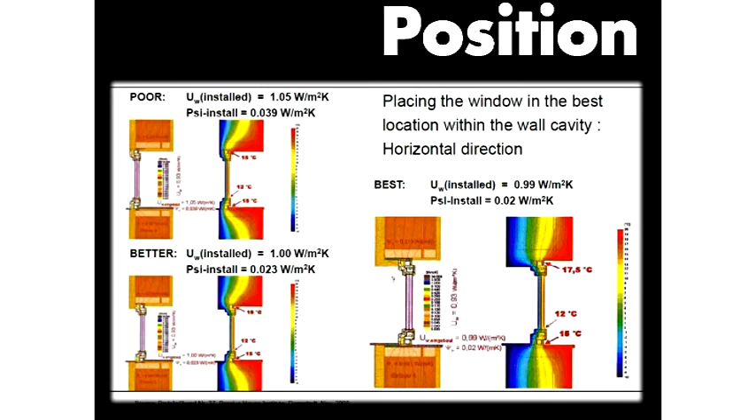Unfortunately, at the same time when I realized this, Passive House released their 2-year-old study that window placement is really crucial. Windows should be placed 40 to 60% within the wall cavity, and we also should over-insulate these window frames. So if we're looking at this window as an example, it looks like it's all the way on the inside. However, it's a 24-inch thick wall, so this is just halfway, 50%.

Forget about all the formulas. This is what you want to remember: you increase the efficiency of this window by 20% for free by placement of the window within 50% of the wall, and by using basically over-insulation. I do it on both sides. The frame basically is what really our main heat loss is.

The edge loss basically is always the greatest. We'll see it on a thermal image here later. It's really nothing else other than putting a fur hood in front of a window. Fur hoods, again, indigenous wisdom—we figured that out 10,000 years ago. We create a pocket of warm air in front of where we look out. It's exactly the same thing. It's so simple and it works so well, and we can save 20% of the energy on the weakest link of our assembly.

So, yep, I was wondering what the difference between 40% and 60% is. This is basically what I'm trying to explain here about balance. I was just going to ask how much do you need on that? It's balance. We need to find a balance between a few things.

We have one core problem: daylighting. The further we place the window on the inside, where we'd thermally be better, the bigger the fur hood. However, what happens is we are limiting how much solar radiation we allow into the building because of the shading from the wall. The thicker the wall, the more dominant that becomes. So really, that's why 40 to 60% is a balancing act. For what we've tried over the last few years and monitored, 50% works best, in my opinion.

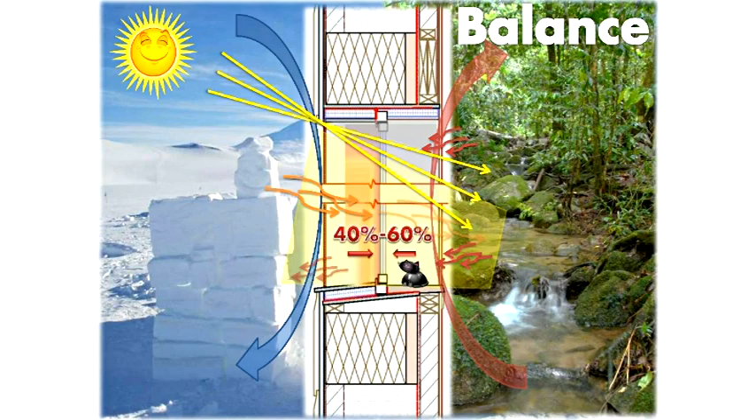People always enjoy window sills. How far into the spacer do you do that? Do you find that insulation is—well, I use a tilt and turn window, which goes to the inside, which has the thicker frame on the outside for that reason, also for the air tightness, built into the frame. Yep, so we over-insulate about an inch over the frame, basically. But really, the window frame is your defining factor for what window you're using.

I can't stress this enough, this is really huge. Even in a not quite as super insulated building, window placement can make such a difference.

Are your windows fiberglass? Yeah, I only use fiberglass. I have not found any other material for our climate which is stable enough to eliminate the flexing in the frame for air tightness. With vinyl, one winter at 40 below, that frame is flexing so much that all of your air sealing you've done very carefully is ruined, just because of the deflection.

You get 40 below here and 70 degrees there. We have the Arctic and the tropics on the space of a window. It's extremely stressful on these frames. And sometimes we have temperature swings from one day to the other, from 40 below to 20 above. Think about the forces on these windows, it's tremendous. So for our really cold climate, fiberglass is the only material I've found which is stable enough for windows.

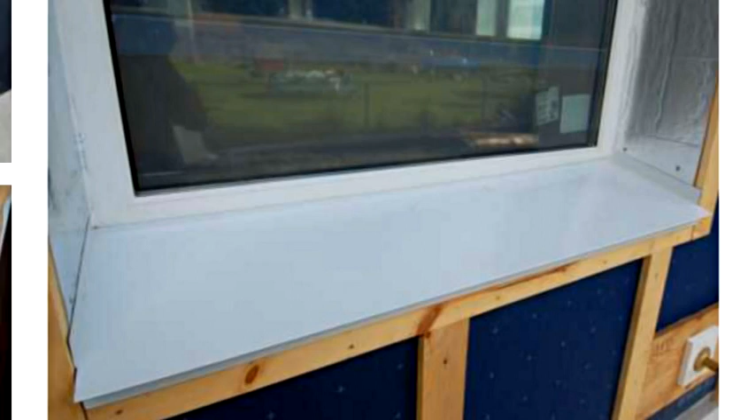And then this is air sealing tape on both sides. We have a special air sealing tape, one on the inside, one on the outside, specifically made for this application, which comes from Switzerland, has the right permeabilities. We have a very impermeable tape on the inside with a 0.1 perm and a 1 perm on the outside to allow drying potential within the insulation to the outside. It sticks to the plywood really well, it sticks to anything. Between the tapes is spray foam basically for insulation.

What brand is the window? We use local windows, Greatland Windows in Fairbanks. I'm very happy with them. It's a new company, not what used to be Alaska Window. It's a tilt and turn, German hardware, 7 lock points. I spec out the glazing to what I need, we glaze every window differently. The south facing, west, east, all of the windows are glazed specifically for the orientation, so they're glazed differently. That's important, to have a window manufacturer who works with you on that for high performance buildings.

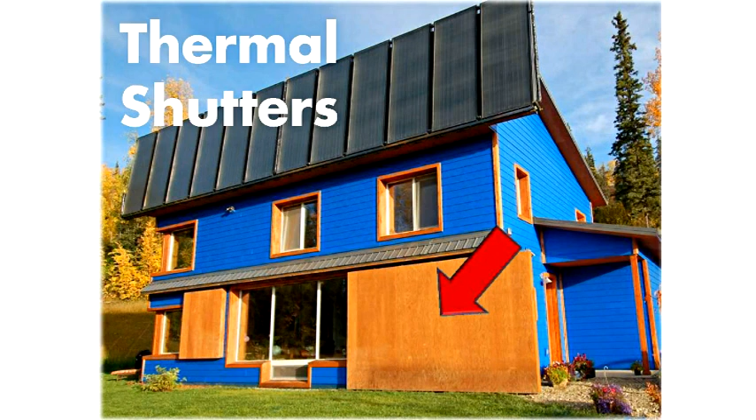So I can't stress it enough, really, please, if you build buildings like that, place the windows where they belong. And then the big crux for our climate, the thermal shutters. This building could not reach passive house levels without thermal shutters. We cannot reach such an efficiency level without thermal shutters. That's really the weak link.

It shows really well on this thermal image I took this winter. This is the big window, these are upper windows, you can see the wall, it's very well insulated. You see a little bit of loss on the collectors, but overall very good. Again, the brighter the color, the more the loss, especially on the big window you see the edge loss I was talking about, much more drive. Now take a look at this, taken basically the next morning with the shutter closed. How much of a difference this really makes.

And this big ugly thing here is a 1,200-pound shutter, it's extremely heavy, which closes right in front of this window.

Is it cellulose insulation again? No, this is spray foam, you can't get cellulose in there, it would be way too big. Between the window and the shutter, is there air sealing? No, there's absolutely no problem whatsoever. I was very worried about how to air seal this, I put it up and it worked like a champ, I've never touched it again. So there's no air sealing done between, it's tight, yes, but it's not air sealed. Like on old shutters where we'd tried this before, where the windows were on the outside, we had all of these problems. With the windows inset and this warm pocket of air created, this works really, really well. It's a day and night difference. That was one of the big questions when we did this building.

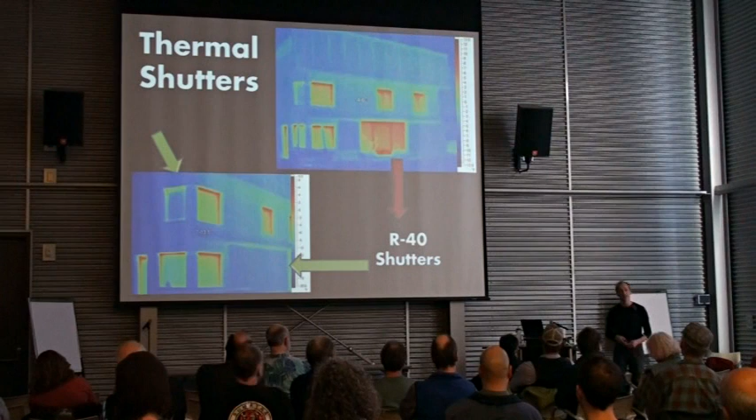So if you're looking at this thermal image, the windows are really the weakest link. That's our key problem we're having, so that's what we need to address. Unfortunately, there's nothing on the market right now, there's no commercial product. Is the big window the only one you use a shutter on?

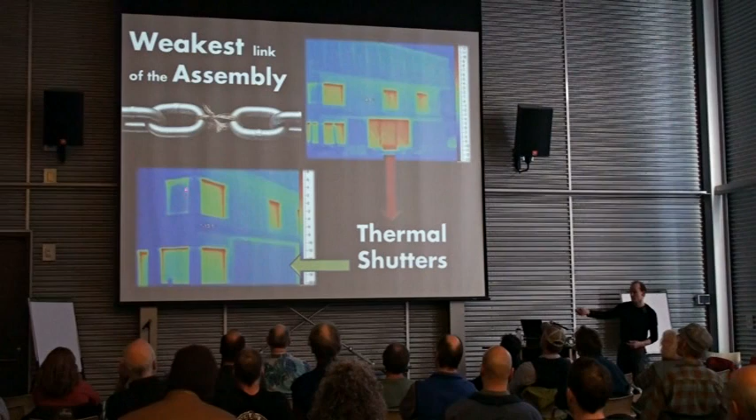No, we're looking at this right now, you can see here it's closed. It's an internal shutter. One of the things I've done on this building, basically because of costs, I placed most window shutters on the inside. Because I figured by the time we come up with some mechanics to operate them on the outside, it's going to be too expensive. Out of all of the mistakes I've done on this building, that was the biggest mistake. They should have not gone on the inside. I spent way too much money building them, and we are not able to control icing on these windows.

We tried very hard to air seal as good as we can, but you can see here there's still loss. And if it gets 40 below, we get icing on the windows, which we have to chip away, basically. They still work as far as thermal performance goes, however it's just icing problems we're seeing on the windows. Also, building them was a lot more complicated, a lot more expensive than I anticipated. It was a major pain. It took us about 3 weeks to figure out how to actually build them, how to actually make it work. It was a huge pain, and then in the end we have icing problems on the inside.

So now we place everything on the outside, and I can't stress this enough. Looking back it was a big mistake, an obvious mistake, but they need to be on the outside.

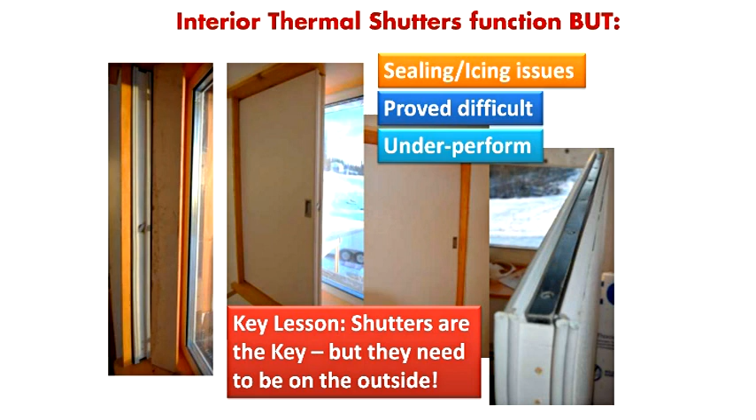Are you using steel spacers on the glass? The steel spacers in the middle? No, it looks like that one on the left looks like a steel spacer, not a high efficiency one, on the window? Yeah, on the glass itself. Oh, that's basically 2 stainless steel spacers with cork in between because it's heat mirror. That usually heat mirror can't use the... Yep, that's because that's heat mirror on this one.

What else? Yeah, no interior shutters, I mean on this building. Is it, do they not work well? No, they work, they work. Because you tend towards more perfectionist sort of stuff. No, I mean they work, thermally speaking they work perfectly fine.

However, you're icing your window when it gets really cold, so you're creating ice on the window. You are dealing with it every day, you have to get rid of it. It melts when you open the shutter, and then it creates a puddle of water on your windowsill, and over years you create mold problems. It's just not a good situation. It's like a curtain closed, you're trapping the inside air when you close it. Exactly.

There's just so much airspace in between, and your relative humidity level drops to dew point, and the dew sets up on the window. The window is cold - you open the shutter, it's like opening a freezer. You close them for an hour and open them again. They work really well, but you have an icing issue. If they're on the outside, none of these issues appear.

So I have several prototypes we built now with micromotors, basically just a push button, which close in front of the windows. Air tightness isn't so key on the outside, and it's much better performance from what I've seen on other prototypes. So like this building here, we're placing everything on the outside. Everything is controlled by a building system, by daylighting, so it can be automated, and that's really where they need to be, just on tracks. It's just a matter of designing the building so that all of this fits, which is sometimes very difficult, to make space for that shutter.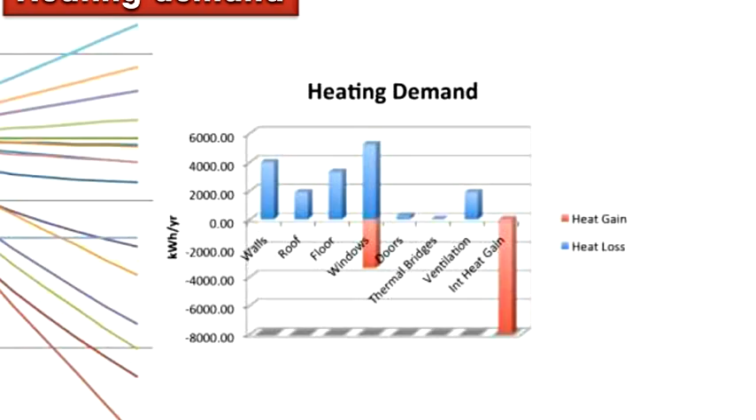If we're looking at our lines again, this is our dominant line, and here the bar chart. This is our gain from the windows, this is the loss from the windows. Now we're removing the shutters - this is what happens. Exactly the same model, exactly the same building, exactly the same window. The only thing we're doing is removing the thermal shutter. So we're jumping from 13 to 20 kilowatts per square meter, and this is our loss, much bigger than our gain. And that's basically reality - without thermal shutters, we cannot get to passive house level in our climate.

Just wondering, if it's a cloudy day and you don't have direct sun, is it worth having the shutter open for daylight? Yeah, with regular daylighting you still get quite a bit of irradiation out of it. The minute you have good daylight, you're much better leaving it open. Of course, also for human health - we need light in buildings, big windows, especially in the wintertime when it's not very light out. The minute daylight is up, we open all the shutters and let daylight into the building, but the minute it gets dark and the sun is completely gone, we close them.

Do you recall the square footage of windows on there? Oh boy, off the top of my head, I don't remember. But it's basically this south-facing front here, this is what you're looking at. So it's huge. If you're looking at the efficiency level, unfortunately, that's the truth of it.

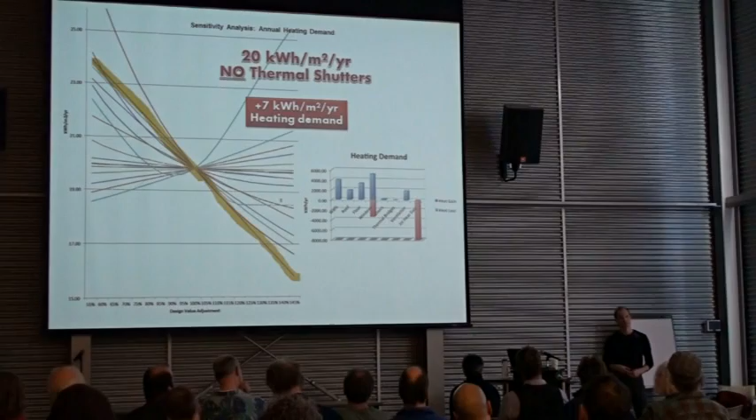We're really stuck with thermal shutters until window technology gets better. I spent a lot of time, traveled to Europe quite a bit, and talked to many of the high-performance window manufacturers in Germany to look at options. What can we do? We experimented with 5-pane windows trying to come up with solutions, but we're losing the solar heat gain coefficient, and we are basically giving away our free energy as it stands right now. In maybe 5 years that might be different, but for now, the low-hanging fruit really in the buildings is on thermal shutters. Also for retrofits - think about a lot of these buildings we're trying to bring up to snuff, placing a shutter might be a very good solution for a lot of these. And that's nothing we really look at too closely yet.

So, this is a super insulated door I've built and developed. It's an R60 door, has 9 lock points. It's super efficient, but this is what happens at 50 below - I can't get in, it freezes shut. So one of these things, you think you have it all figured out, but then one little piece of steel ruins the whole day.

And I still haven't found a manufacturer to make me a graphite piece for this. I know it's very efficient hardware, a lot of locking points, but it's one piece of steel which just kills it when it's getting really cold. So that's a challenge of our climate. What if it just didn't latch? Yeah, right, you can get a positive fit. Yeah, so it's very unfortunate. You go through Germany and talk to these manufacturers of this hardware, explain this to them, show them a picture, and they look at you like you're totally crazy, like you're from Mars. You're like, you're serious? Yes, I'm serious. So they don't understand.

Thermal mass - I'm a big believer by now in including a lot of thermal mass in my buildings to even out temperature swings.

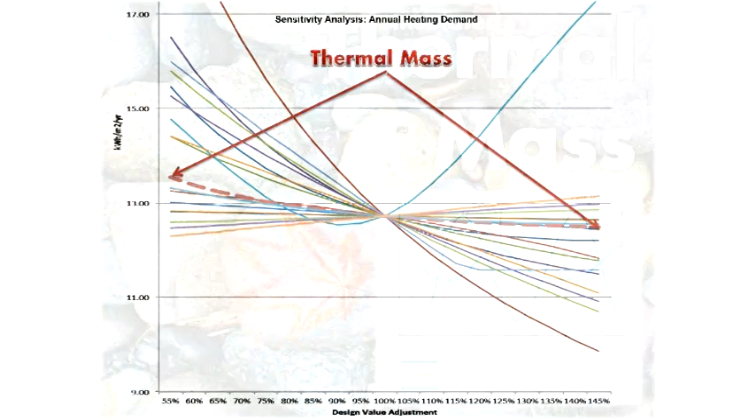Overheating in the summer—again, our bar chart doesn't show much on this. It's very difficult to model thermal mass in buildings. On this building, we placed 180 tons of sand under the standard slab. This is basically what you're looking at here. We're using that for additional thermal storage, to temporarily store more passive solar gain.

Sun beams through the window, and we try to catch it. In the slab, yep. So this was here, not your house though? Yep, this is my house.

Oh, but on your earlier slides you showed foam? Yeah, the wall picture I showed earlier is from our new design. This is the old design. You did pour a concrete floor? Yep, on this one, this is how we went about it on my building.

So here's our big window. We can see the daylighting, the sun beaming into it. This is really what heats my building since mid-February. This window, this big slab, keeps this thermal flywheel going to maintain a 68 to 70 degree temperature even at these cold outside temperatures.

We have enough storage capacity to bridge a few days when we have no sun, so the building doesn't cool down to a level where we have to heat. This is about a one-week thermal flywheel which we create. It's a fine line of calculating out your mass over everything else. So very simple, no maintenance ever, very basic, and it works really, really well.

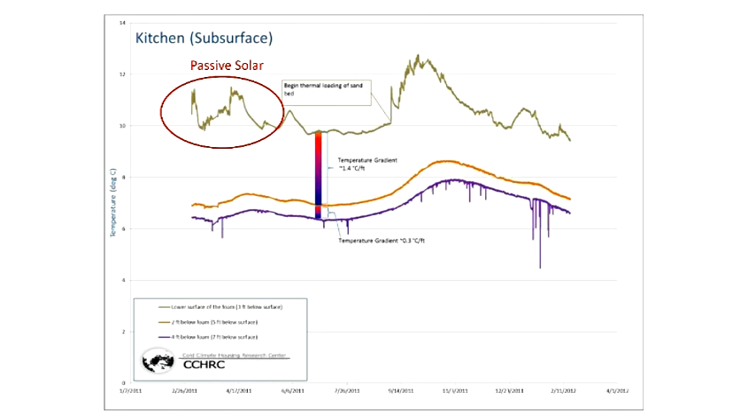This is just quickly here—from the sensors, we can clearly see the passive solar gain and how we store energy, and then the annual heat storage.

Last but not least, the big question: how do we bridge this 3 months of nothing? This is unfortunately reality for us in the dead of winter—when we need the heat the most, we have none available. What a bummer. So heating is our problem in our climate, there's just no way around it. This is very specific to the really cold northern regions—in other climates it's a little different, but for us this is the thing to remember: it's all about heating.

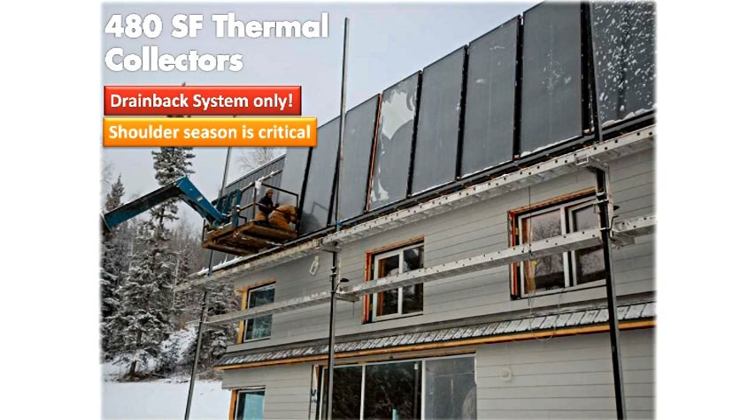On this building I used 480 square feet of thermal collectors—basically 12 collectors, 4 by 10, flat plate solar collectors. What I found in Fairbanks is that flat plates work better than evacuated tubes because of icing. We don't have enough off-heat on evacuated tubes and they ice up too much—when we need them the most, they don't work anymore.

Flat plates are very inefficient as far as energy loss goes, so they're producing enough off-heat to melt that ice off, and then they function. So I'm a big believer in flat plates for my climate, also for the simplicity of it. We're actually building a lot of these now in-house, big systems ourselves, because there's nothing to it—it's just copper pipe, some fin tubes, and some glazing. So we're reducing costs quite a bit.

For bigger systems, they're 32-foot by 10-foot collectors, one unit, so we don't have all of these heat losses on all the individual collectors. The biggest cost for most of this is transportation getting it here, so building them locally will be a big saving, at least 40% in my opinion. And it's very basic technology—there's nothing which can go wrong. We've had collectors like this on roofs for 60 years, which still work.

We're just circulating fluid. One of the biggest lessons learned on this building was it was a pressurized system when I built it, always under pressure, and I had way too much heat—I never knew what to do with it anymore. My heat storage capacity was underestimated, so I had much more heat produced quickly than I thought. I didn't know what to do with it, so I always fought with what to do with my heat. What a problem to have—creating too much energy. I converted it last spring to a drainback system.

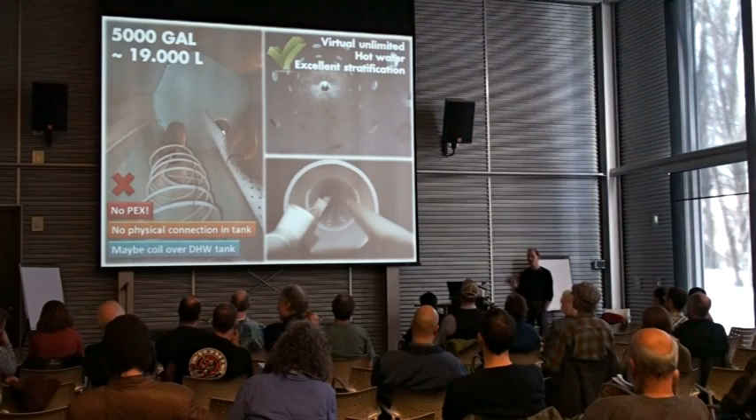When you first start out, it seems mind-boggling how to design and build these. But now where we are, it's half the plumbing of a boiler, and there's no maintenance. There's nothing to it. And it runs on 48 watts. So it's really, really interesting.

Two pumps, yeah. It's water and glycol, so we have a plate exchanger, unfortunately, which we need to use. Ideally we would want to run water, but at 50 below, that's a little scary.

The top of this is basically a picture taken from the bottom of the tank up. This is a stainless steel tank which we custom built—it's a tank in a tank design. So we're making our domestic hot water basically in here. The line you see here comes in on the top, drops to the bottom, and coils into the domestic hot water tank. It's under house pressure, basically.

It's the cold water coming into it, and then it's preheated from the mass of the big tank. The hot water is simply made by convection. We have a large amount of hot water—there's 5,000 gallons of hot water surrounding this little 40-gallon tank, and through convection it heats up that water. So it's very basic, nothing really involved. It's just physics.

Like I said before, we can shower, run 2 faucets and bathtubs wide open for over an hour before we lose 120 degrees, so it's working extremely well. And then it recovers within 15-20 minutes. It's not like this cools down—5,000 gallons of hot water is like driving a freight train at full speed. That's the thing to remember.

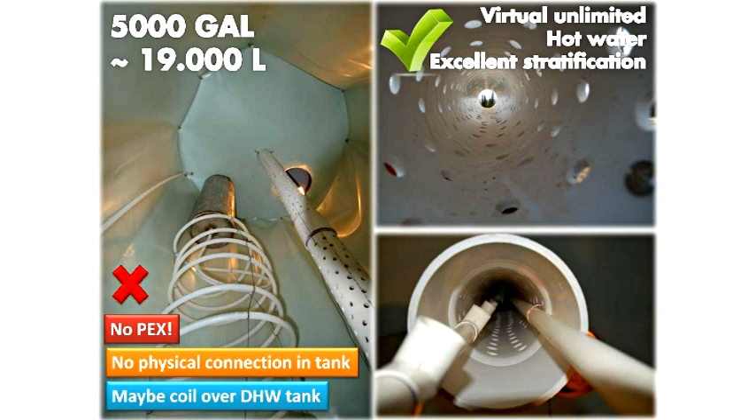It's just an awful lot of energy which we can use to bridge time. To me, that's really for solar hot water systems—if you're looking at efficiency and paybacks, the only problem we're having is the storage. The storage we designed for these things is too small. 100-gallon tanks just aren't cutting it. We have days when we have no sun—3 to 4 days, no sun. Well, we used up the 100 gallons the first day, and then we have nothing, and we fire a boiler again to do that.

Here, we can go 6 weeks. I can go 6 weeks if I'm charged up without doing anything. I can turn it off for 6 weeks and I have hot water for a family of 4. So we can bridge these times when we don't have sun.

The design in the middle here I call a solar stratifier. That was the big missing link for me to make this thing affordable.

What is commonly used in Europe is basically 3 sets of coils - in the bottom, in the center, and in the top. The solar controller loads the heat depending on the temperature it gets on the roof.

In the morning, let's say we're getting 90 degrees. The bottom of the tank might be 40 degrees, so it's very worthwhile storing 90 degrees. Can we do anything with 90 degrees for hot water? No, we need a minimum of 120. However, in a building which only needs to be 70 degrees, 90 degree hot water is pretty valuable.

So we can collect much more temperature ranges, and during the day temperature climbs up maybe to 120 and 160 in the evening, past high noon, and then they're loading these big tanks through these coils.

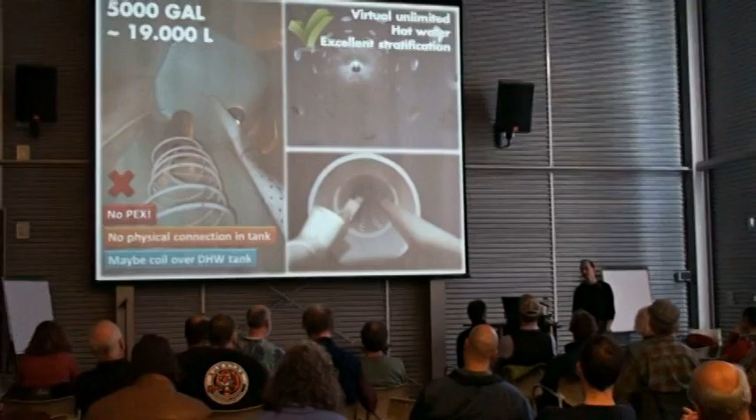So the biggies so far: I used PEX for this pre-warming. It works, however you get a taste of plastic on hot water. It's a bummer - it's 160 degrees in this tank quite often, and that's too hot. So I'm going to get rid of this and replace it with copper, basically just for that reason. It works, but I would not recommend it.

I would use copper. Another experiment I'm going to run here soon is replace this tank - the cost of it and also the complexity of it is a little bit too much for me. Also the fact that we have mechanical connections within the tank scares me - one of them goes out, you have a problem. We have overflow protection and an alarm with a float in this tank, but nevertheless, simplicity - I'm trying to make it simpler.

So we're going to place just a copper coil to replace this little tank and run experiments on how performance compares. That will allow us to keep all of the connections out of this tank. Everything else worked really well.

If we are having a non-heating demand, only a heating demand, like on this building here, we have hardly any hot water we're making - this is a small public library building, so the only thing we're really worried about is heat. So I place it under the building. Again, we don't need the stratification in this case because we're only concerned about heat, and we can save valuable space within the building. So I'm not saying this is the only solution.

For residents, I would always use an upright container, 2 stories, 3 stories tall - I just finished the design on a 3-story tall tank for residents. But on a commercial building like this here, where we only place our concern on heating, it's very feasible to put it under the building.

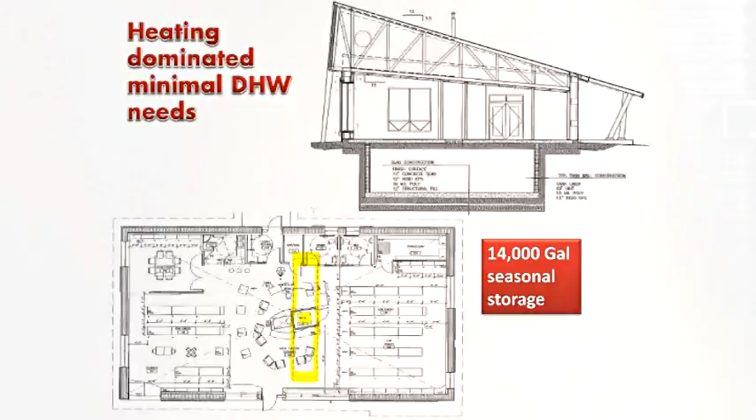This is just an ICF, very simple to build. Same principle, we're using a liner in this - this is 14,000 gallons in this case. We could make this bigger too if we would have enough collection available. We need to keep a balance between collection and storage, of course.

If we don't have enough collection and we have too much storage, then we're having an unbalanced system. And then again here, this is a masonry heater which ties also into the same system, with a little access hatch to be able to maintain it.

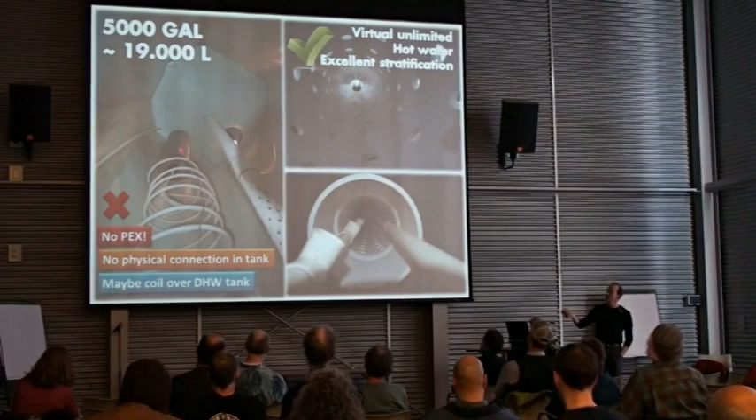I guess I forgot to mention this. Of course, the domestic hot water circulates through two coils in the masonry heater. So every time in the winter we fire our masonry heater, this is where we heat up our domestic hot water. And then we're going the other way around. If the surrounding temperature of the big tank is maybe at 120 degrees, and we're heating this little tank up, within an hour we have 160 degrees in here, then we're heating up the big mass basically, and we're keeping the storage so that we have hot water during the whole day, and we don't rely on a fire.

Before, when you came last year, you talked about having an auxiliary heat pump, or? Yeah, I removed that completely. There was a backup we had originally, which I removed because I never used it. It's not needed.

On your new drain back systems, are you still using glycol in the flat plate? Yeah, certainly. For our climate, I'm too chicken to use just water. Ideally we would only want to use water, but it's pretty scary to do in our climate.

A tank you want to drain into? Yeah. In a milder climate, I would definitely recommend just using water. Every time we use glycol, we lose efficiency. If we're using a plate exchanger between water storage and collector, we're losing 8% just in the transfer between the plate exchanger. Do you know what the efficiency loss is to glycol? To glycol depends on the ratio of the glycol, but it's definitely up to 20% easy.

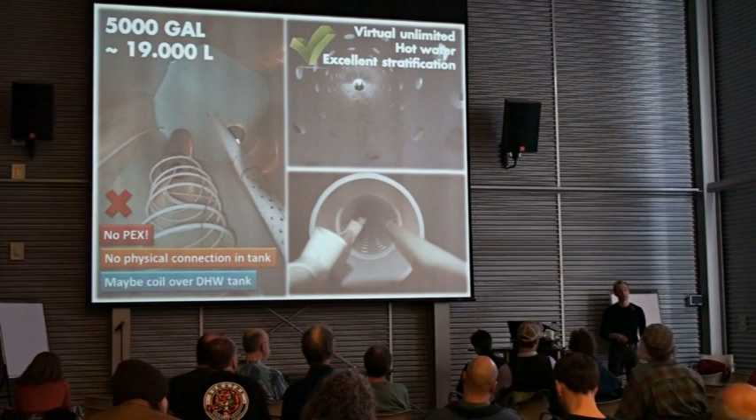And then again, the house has... I mean, this is one tank. The controller looks at this tank as four tanks. So we're looking at the different temperature settings so we can store all of this energy. The key to remember is, you're better off with a bathtub full of warm water versus a cup of hot water.

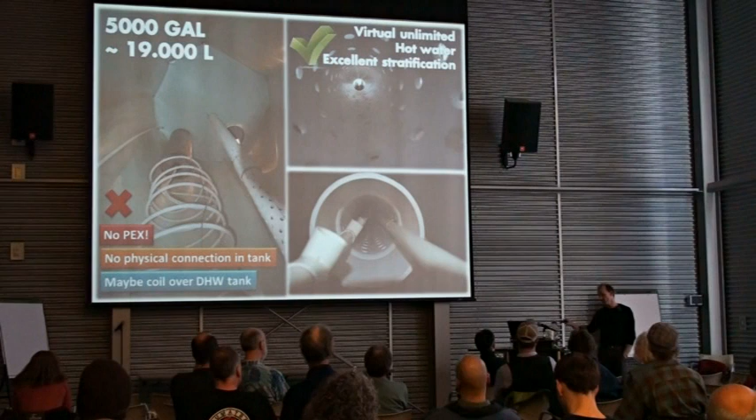Solar thermal systems usually only come on if they're reaching 140 degrees almost outside. We need a minimum of 120 for hot water. We need about a differential of 20 degrees before the collectors come on. So we need 140 degrees to be able to do hot water. With the system I have, beginning of February at 39 below outside temperature, I already collect 140, 160 degrees of hot water off my roof.

So like this morning when I checked my collectors, I was running steady at 168 degrees. So my big tank is going to be fully charged here probably by the end of March, which is pretty amazing. Water, I use water as my medium to store this energy. Think about it as a battery. It's nothing else, it's a huge battery basically, where we're trying to store thermal energy.

It's very easy, it's very simple. It's available to everybody, it's non-toxic. There's nothing to it. But for our climate, it just doesn't have the energy density we really would need to be able to do annual storage. So we're doing seasonal storage right now. We can bridge about six weeks in my house with the 5,000 gallons. If I would want to bridge three months, the tank would be too big.

If we use different means, phase change, they built tanks like this in Europe already. And I'm really surprised that there is not more development in that direction. If we use phase change materials, we can easily reach a factor of 4. One German company is using a factor of 8 now—they're taking these to freezing temperatures and extracting it with a heat pump. So basically, in a 5,000 gallon tank, instead of being able to store 5 million BTUs, we can store 20 million BTUs, or even 40 million BTUs. That's really when things start to make sense. This is, I think, right now the big missing link as far as being able to bridge this time long enough for our climate. And for the life of me, I don't understand why we haven't figured this out.